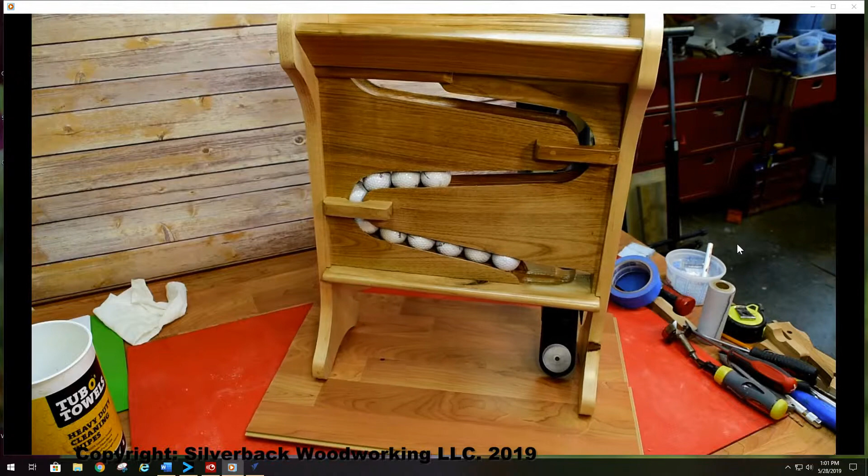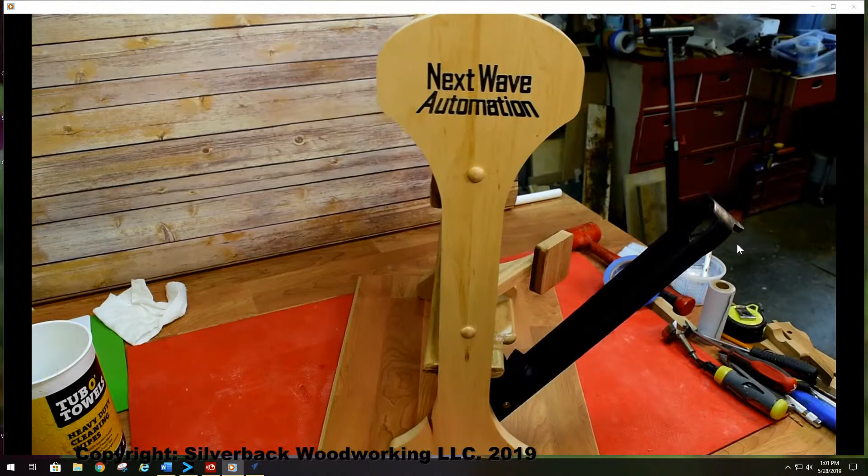With the VCarve software, open the project CNC files. Carefully review all the toolpaths and make necessary changes to suit your tools and machine. The toolpaths are currently set with tool, feeds, and speeds that were used in designing the original project. Be sure to review them for your machine.

Edit the tools and change the settings to fit your own machine and requirements. It is very important to recalculate all toolpaths after making any changes. Once you have made the necessary recalculations for your machine and tools, reset the preview, then preview all toolpaths again to visually verify the project's outcomes.

Create the toolpath files for your machine by using the correct post processor. I cannot emphasize enough, make sure you use the post processor for your machine.

Once satisfied with your settings, save the toolpaths using the appropriate post processor for your machine. Check the toolpaths by air cutting the project or using rigid foam board to run a sample toolpath. Now you're ready to make your own golf ball setter.

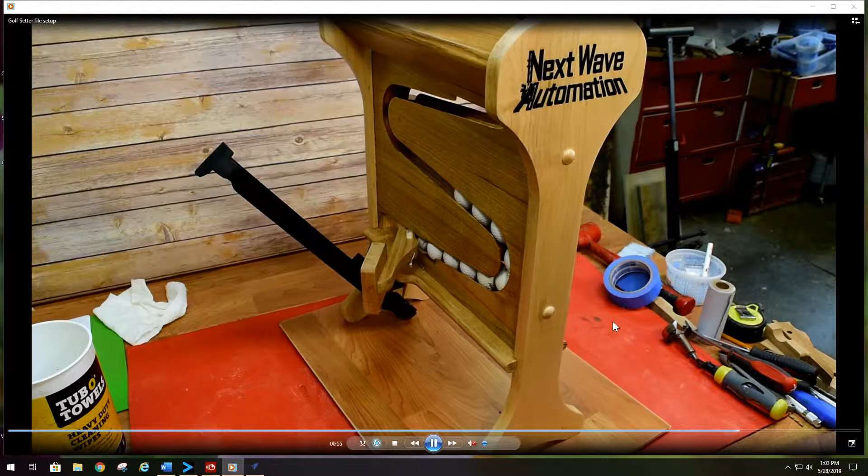Let's open our VCarve Pro. We are going to open an existing file and we are going to do the side, the golf setter side. Remember, this particular project has multiple parts that have to be gone through and set up for your particular machine. So we'll start out with the top side.

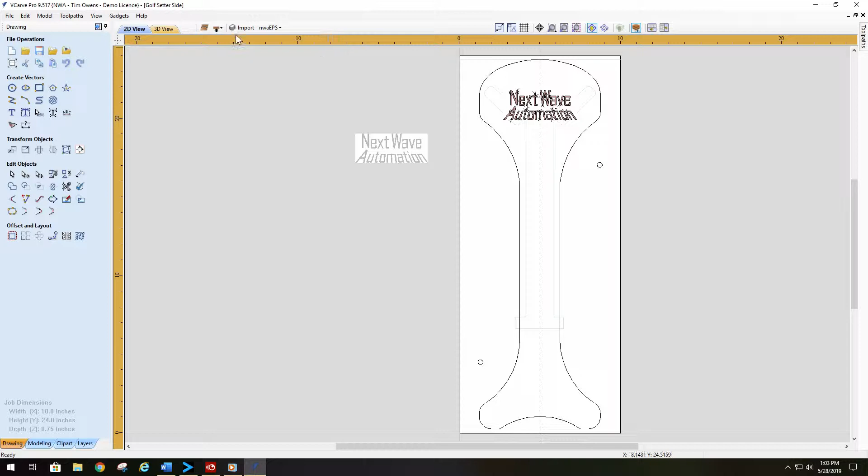This is a two-sided machining. Start out with the top side. If all of these files fit your machine, leave it and do nothing. But I always recommend coming in and previewing the toolpaths.

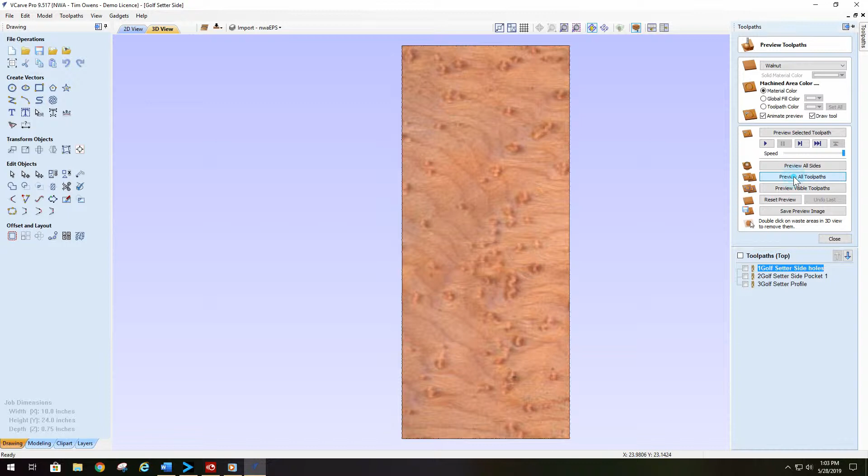So in this preview, we drilled our holes and we cut out our dados and also did our profile around. So now we're ready to save our toolpaths.

To save your toolpaths, you can combine things together. For instance, if you have something that has two of the same cutter, you can combine those files. In this particular instance, file 2 and 3 will be able to save together.

Another thing that you really want to do is make your file names unique to this piece. And also, I always put a numeral in front designating the order that the files are going to be machined. That way, when I go to my pendant, it's a lot easier to see what's going on.

Make sure you output all visible toolpaths as one file and click add the side to the toolpath name. What that will do is take this name and add top to it, so you know this particular file is for the top side of this particular part.

So, side holes, remember they're quarter inchers. See, it says up here quarter inch end mill. Save it for the post processor that's appropriate for your machine. Save the toolpath.

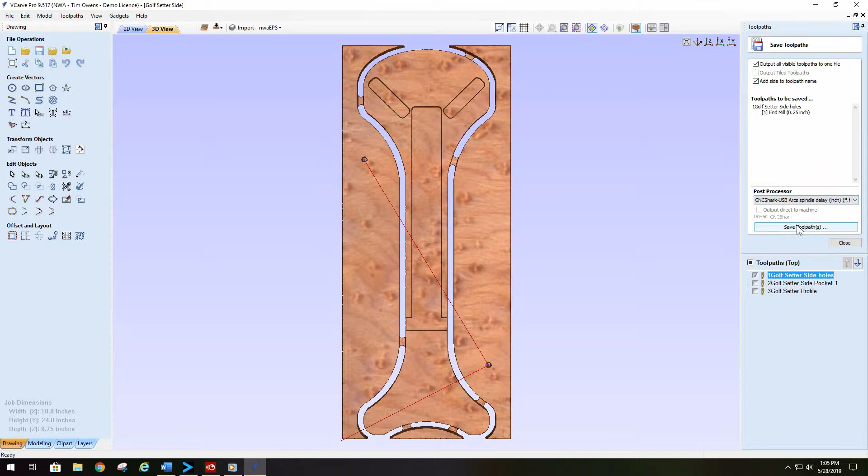I've already got a unique name. All I have to do is go and save. It says I already got one - I know I saved one already. So I'm done. Then go to the next two.

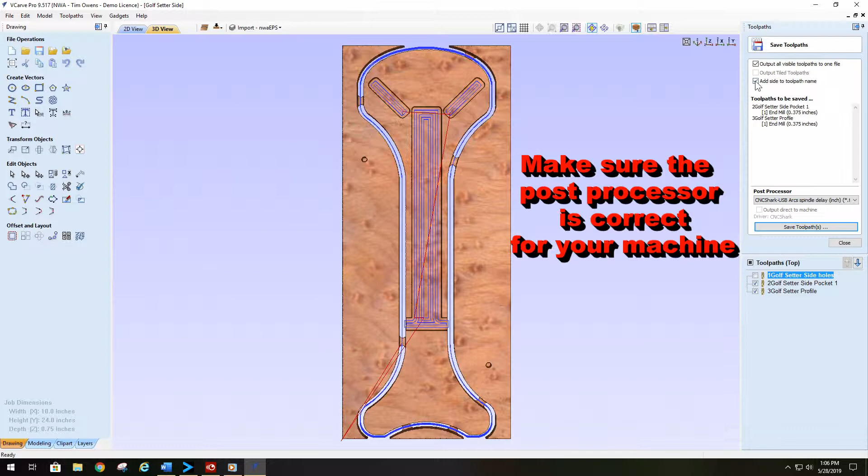You notice if you don't take off the quarter inch one, it tells you you have different tools. Take it off. Now I can run these two tool paths. Make sure your post processor is correct. Make sure you have these ticked off.

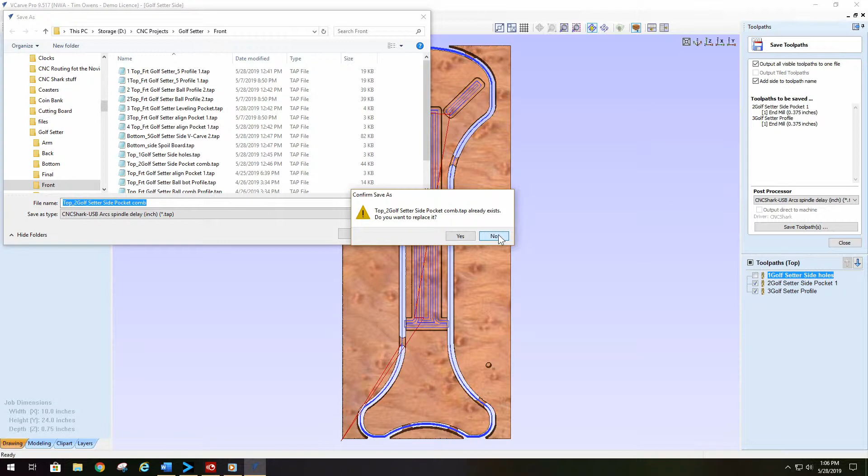Save the tool path. Now with this tool path, since it's a combined tool path, I would put combined on the end here, and I just put COMB meaning it's a combined tool path. Obviously I already have one, so I'm not going to overwrite it. Then save that one.

Okay, we have everything saved for the top. Now we need to go to the bottom and save the files that we need for the bottom. The first thing that we need to do is put two holes in the spoil board to match the holes on the top side, so when we flip it, we get it completely oriented correctly.

So we go in, add the side to the toolpath name. It's our spoil board. It's a quarter inch end mill. Make sure you have the right and correct post processor. Save the toolpath.

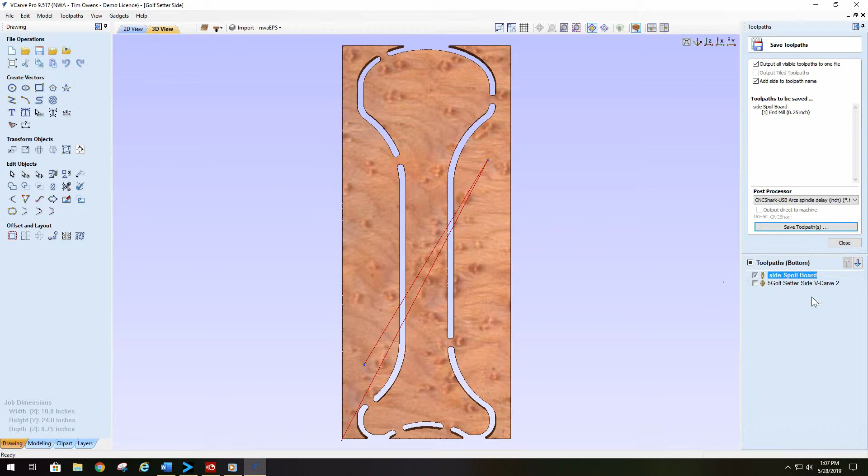I saved it. The next one is the actual V carving. It's a 15-degree V carve bit.

Post processor's correct, it's going to add the name to it. Save the toolpath. Save it. Yes, I do, I know I already got one.

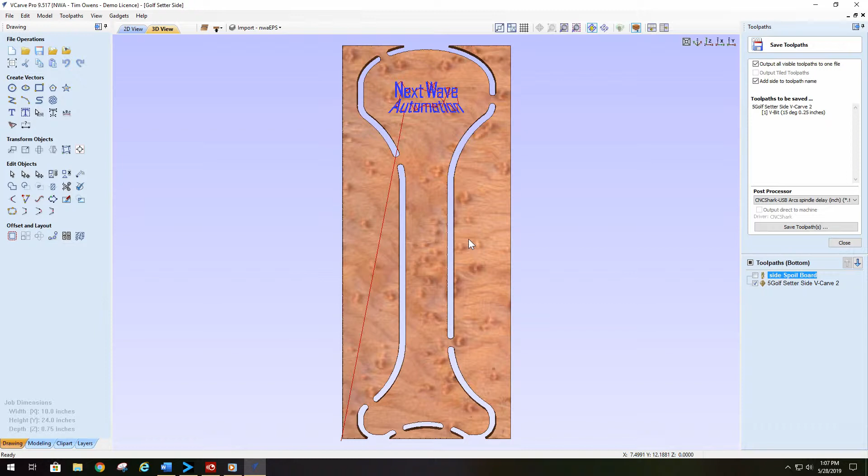So now we're done saving the toolpaths for this particular part. You're going to have to do two of these because you need one for each side, obviously. So we're going to close out of this, and I'm going to show you one more thing - how to do this. I opened up the Golf Setter front.

This particular one does not have a back side, so we don't have to worry about it. Come to toolpaths, but we do have a pretty long list of toolpaths here. And you'll notice I have not numbered them.

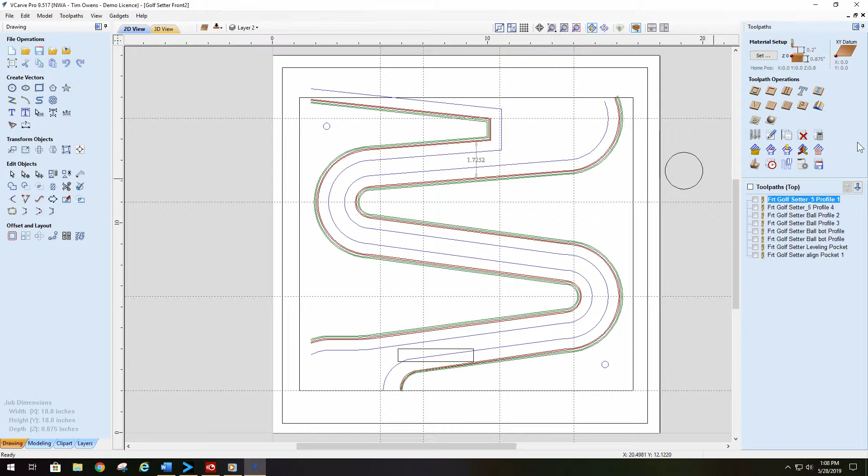Again, just like we did before, if I have to make any changes here, you make your changes, recalculate all the toolpaths, then go into the view section, the preview section, preview all toolpaths. And if everything looks okay, go ahead and save the toolpaths.

Again, anything that has the same tool you can save together. So in other words, we can save the top two together for the very fact they're both half inch end mills, and we can save them together.

In this instance here, I would put a number 1 in front of it because this is going to be the first operation that I want to do. You notice that I didn't add the side to it, but it does have front on it already. So I would go and save this.

Go to the next two or three or whatever and see how many I can save together here. Oop, too many - so they are all the same. I can go into here, and again I can put a number in front of it and save it.

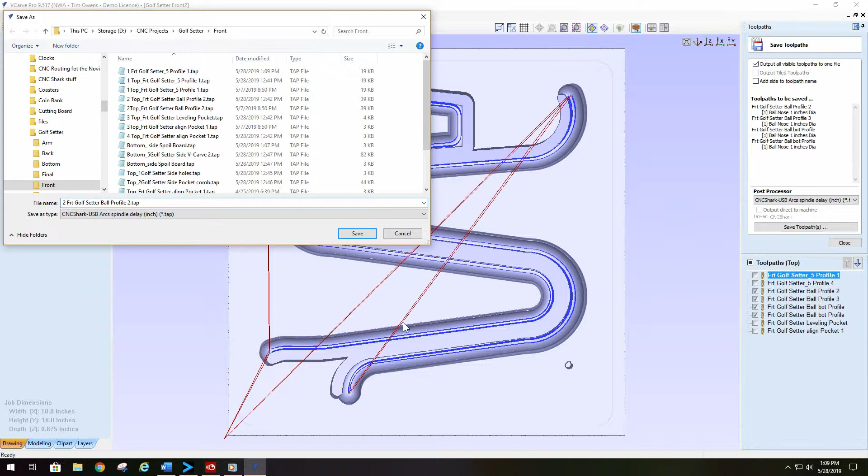Last but not least, the last two cannot be saved together because they're two different tools.

This here is my spoil board cutter, but what I'm going to use it for is making sure that my blank is the right thickness. I'm not going to designate a number for this, for the very fact you can do this at the very beginning to make sure your board is the right thickness. If your board is already the right thickness because you planed it that far, you don't have to do this step.

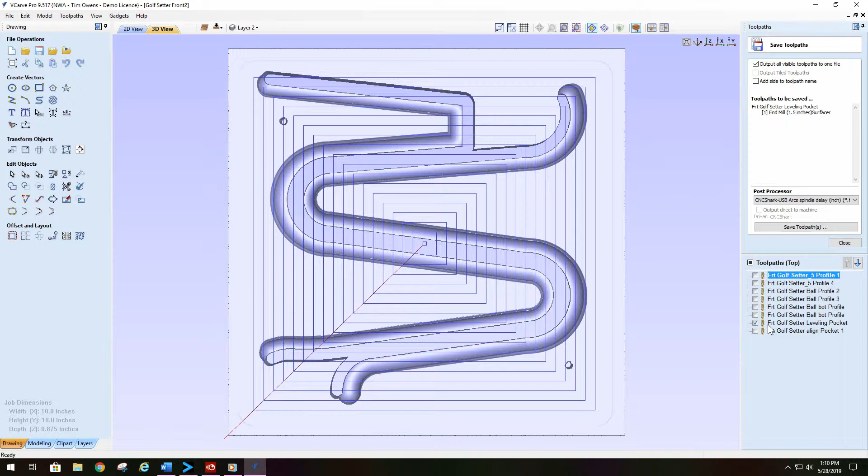So the next one is the setter's alignment pockets. You need these for when we put the two halves together - they align correctly and you don't have to go and do a lot of monkeying around to align all of these grooves on the side, the front and the back when you go to your assembly.

So we come in here, save the toolpath, put a number there, put 4, save it, and everybody's happy.

So that's how I go about saving my toolpaths and getting my toolpaths ready and correct for my machining. Remember, we have many files here to do.

Altogether we got about 40 operations. Now we're going to combine a lot of those together, but make sure you get all these files down right and correct for your post processor and your machine. That's really important. Otherwise, you're going to get some strange results.

So, see you in a bit when we come back to the machining part of our videos. Thank you for being a good customer.

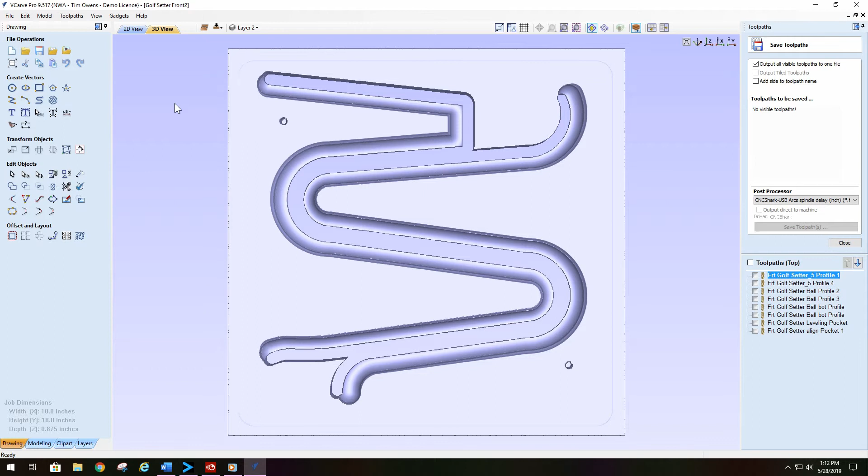Hopefully to see you back in the next segment. The next segment is machining. Thank you.